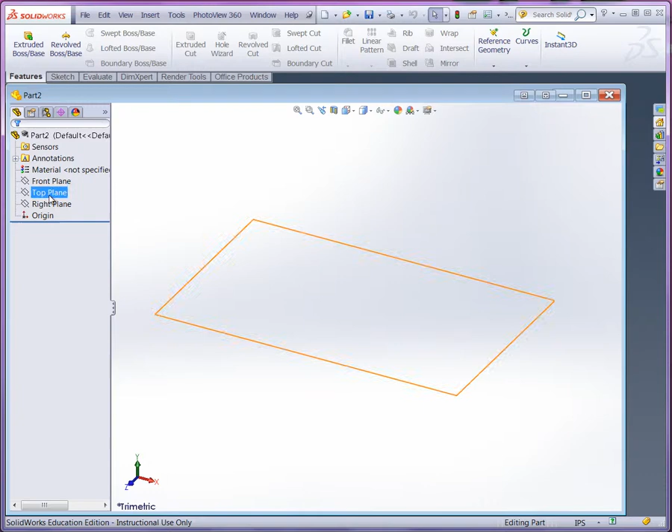Okay, so now what we'll do is we'll continue with the frame part. We pretty much could develop this part with just 2 or 3 different features. And what we'll do is we'll start with the top plane here. We'll create a sketch, basing everything on the origin there. We'll go ahead and set up some center lines so that we can establish the square base.

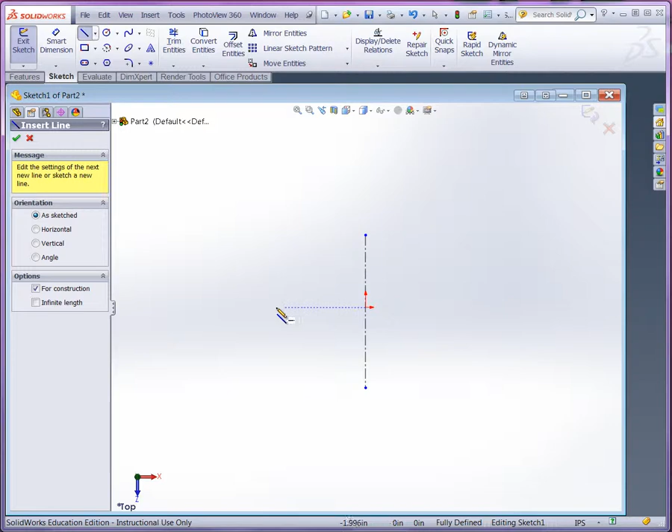I'm not going to use any kind of relations here other than coincident with the center lines here, just using them for reference, and just sketching a basic rectangle. Okay, then we'll use our smart dimensions. We've got the back here at 1.20, and we have our sides here at 1.10.

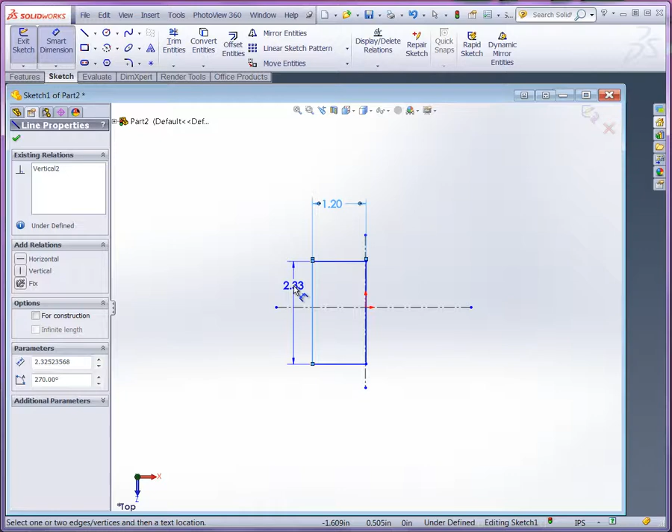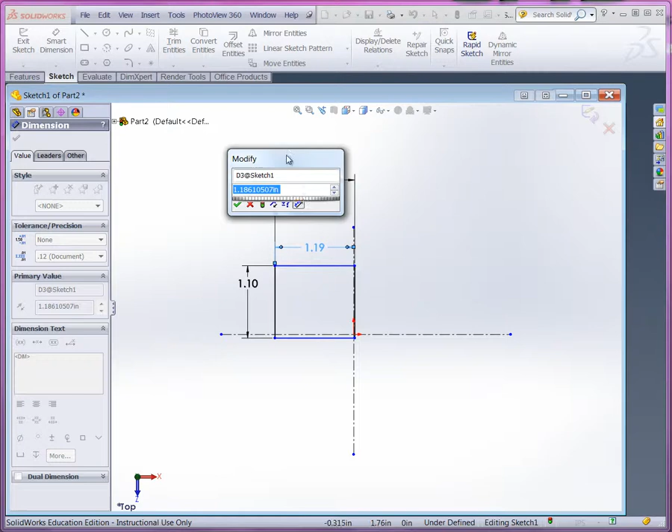Now again, you can see it's not aligned just yet, right? And what we could do here to align it, I'm going to dimension again from the side to the center line. Okay, and this is where you could use equations just to make this a little bit easier for you, right? Or you could just simply make this half the width, right? But if you think about this, if your part is changing, you might want to use equations just to ensure accuracy.

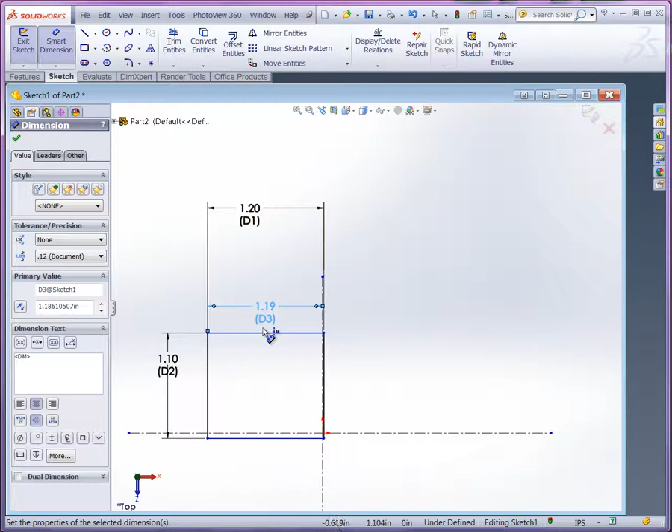And again, one way that we could look at this, let's get out of the smart dimension here, is if you're going to use view dimension names, you can see what they are. Again, if I double click on D3, I can use the equal sign here, and then simply select the dimension, and then use the math expression divide by 2. That should center it.

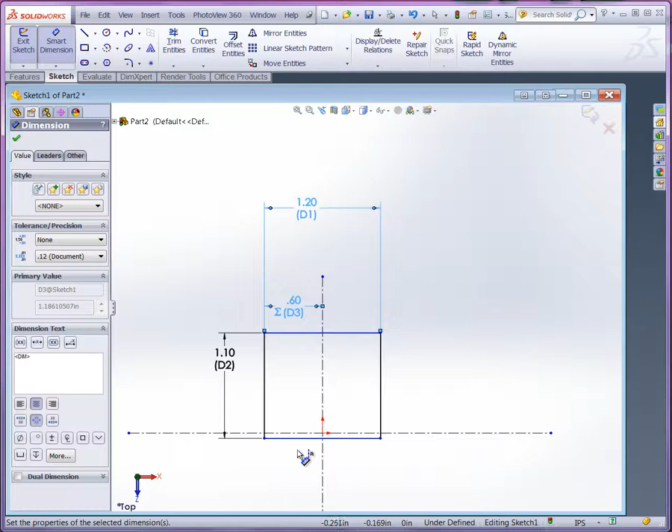I'll do the same thing with another dimension that I create here, and again, this is to align it vertically. So I'll use one edge here to the horizontal construction line there, and here I'll use equal, and I'll use this dimension divide by 2. Okay, and again, you could just do the simple math there to center it, to keep the design intent, the symmetry going.

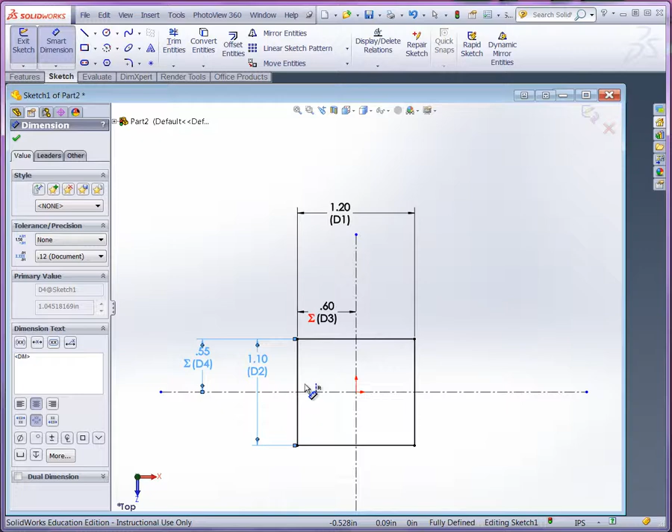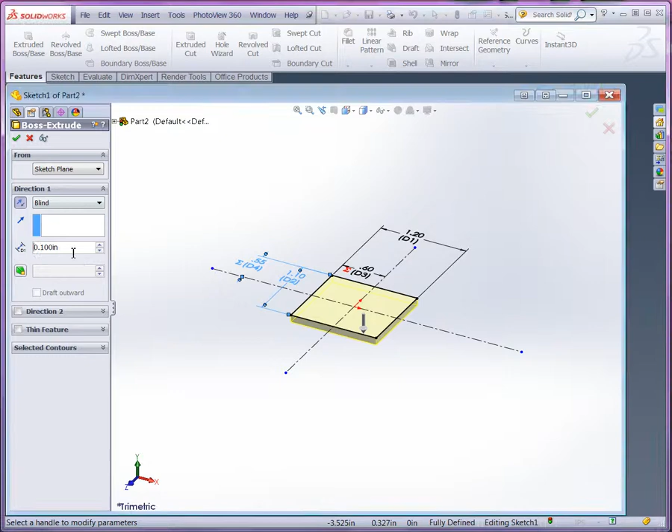And now what we'll do is we'll switch over to features, and I'll use extrude. This time I'm going to extrude going down, okay, so that the origin's on the very top face. And this thickness appears to be, alright, so we're going to do a total depth here of 0.2.

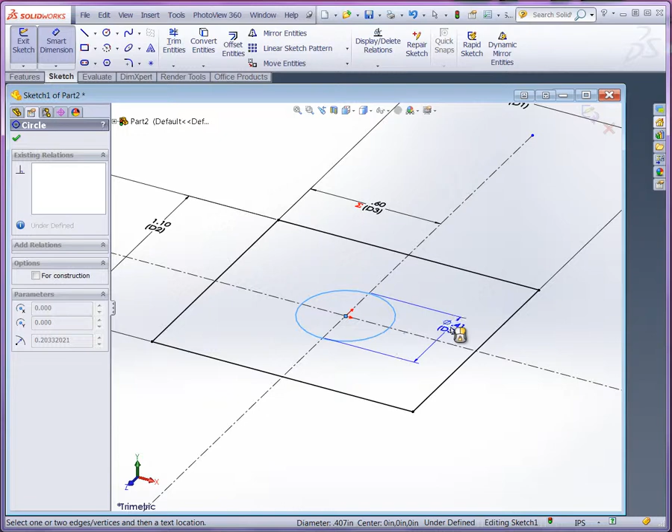Also, if I go back to that sketch, I'll go ahead and put in that circle for the hole that goes through, which is a diameter of 0.30. So again, I'll use the origin there and use my smart dimension to make that 0.30. Okay, now again, as a closed region within a closed region, that's automatically going to produce that hole right there.

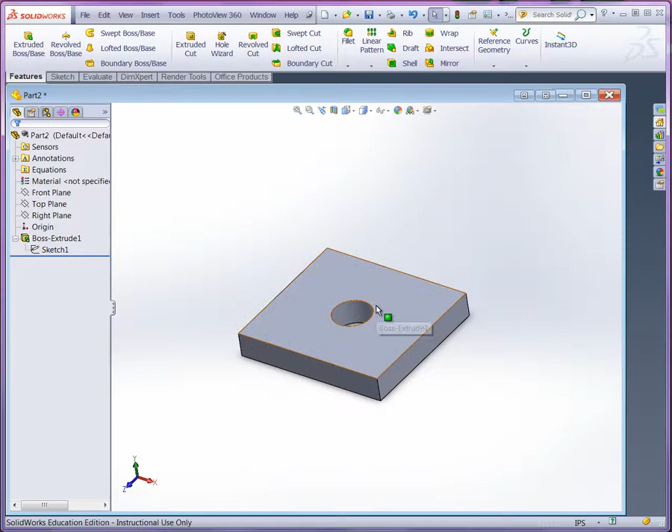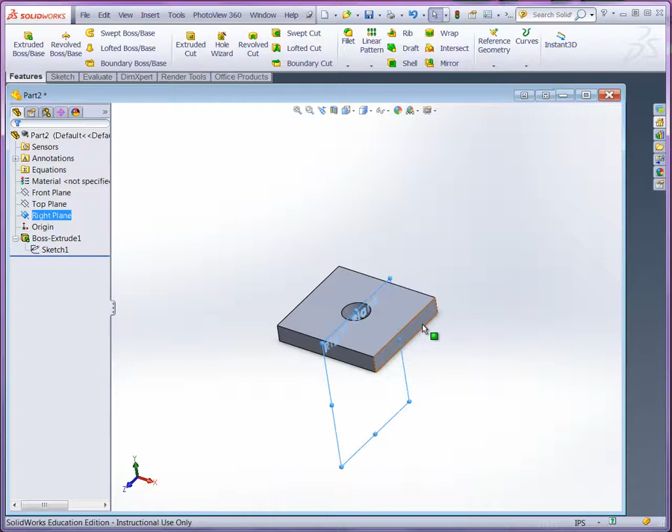Now, as we continue, we're going to use a mirror feature based on the one side that we create. And again, if you take a look at your standard planes here, you can see here's the right plane. We have 2 choices here. We can either offset another plane or simply use the face as a sketch plane for the side there that we're going to create. Either way would work, and it would move along even as the base changes. So what I'll do here is simply select the face and create a new sketch.

so a couple ways that we could approach this would be to either sketch our sides here, or because we're in a new sketch, I can control click each of these edges, all right, and using convert entities be able to project new lines into this sketch.

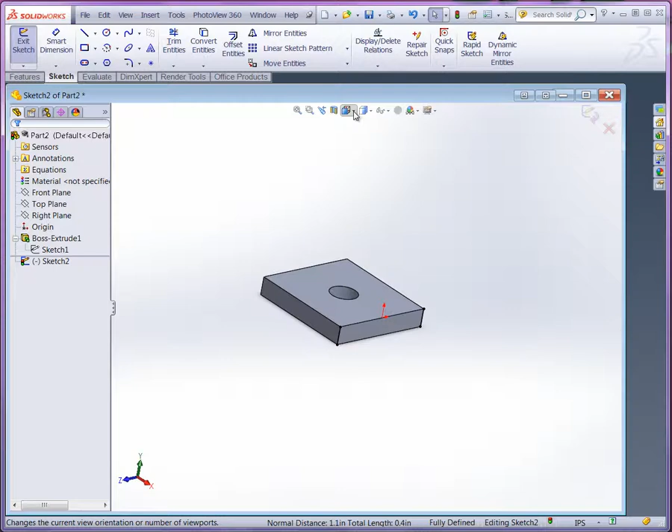Now that'll help because, again, as the base changes, we'll also have changes to the sides of these sketches. The other thing we want to look at here, if I go into a perpendicular view here, is to draw our center line from the origin, make it vertical, and then again set up our radius here. Okay, we can set up both the circle for the hole radius and then the diameter as well.

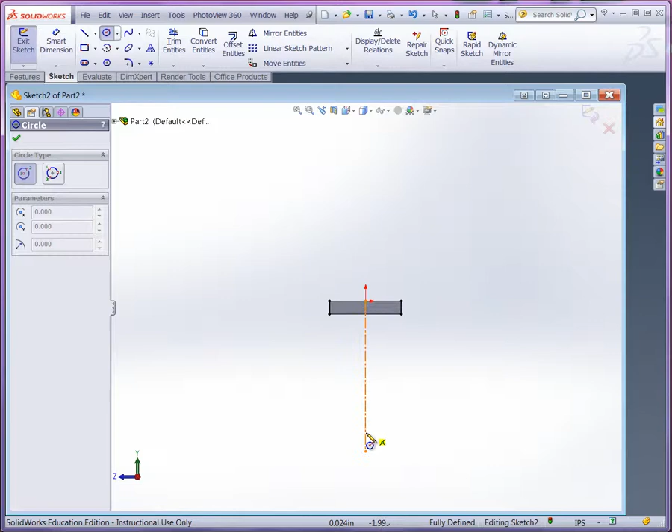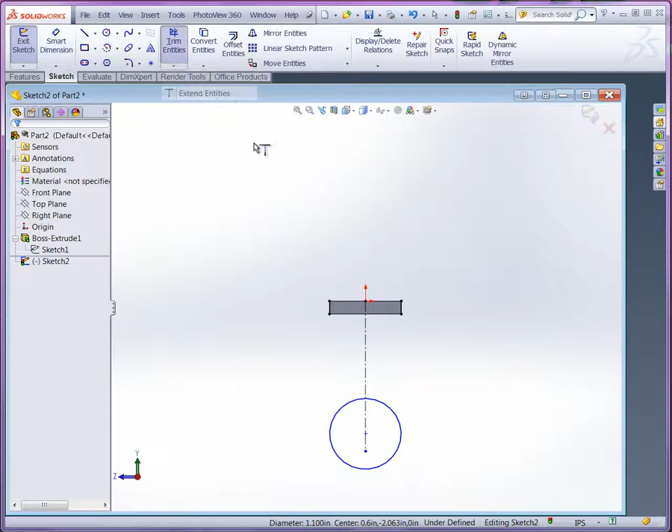Now, if I establish the radius here first, you can see how I can align it just by projection. And if you look at the smart dimension that I have here, you can see that it's 1.10. It's equal to the base width there. And what I'll do now is I'll go ahead and extend our lines and then use trim.

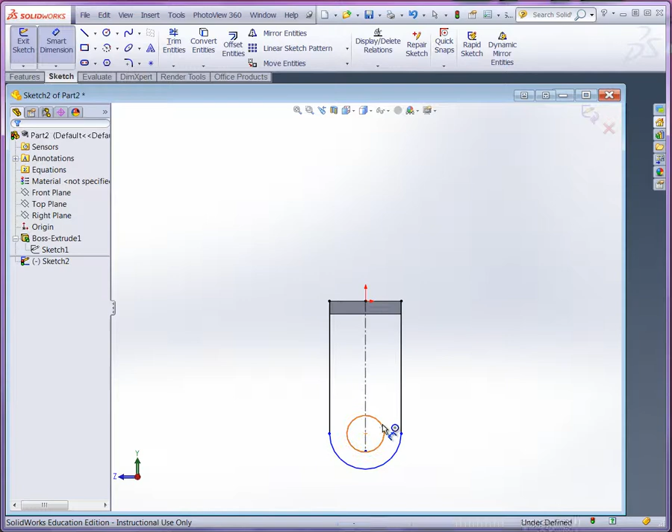So that center is also going to be the center for the hole, and then we'll be able to use a smart dimension to establish its overall height. So I'll go ahead and put that circle that represents the hole right on the center of the previous radius. We'll use a smart dimension for the hole, which is going to be 0.30. Okay. Now it's the position of both that hole and the radius that we're trying to control.

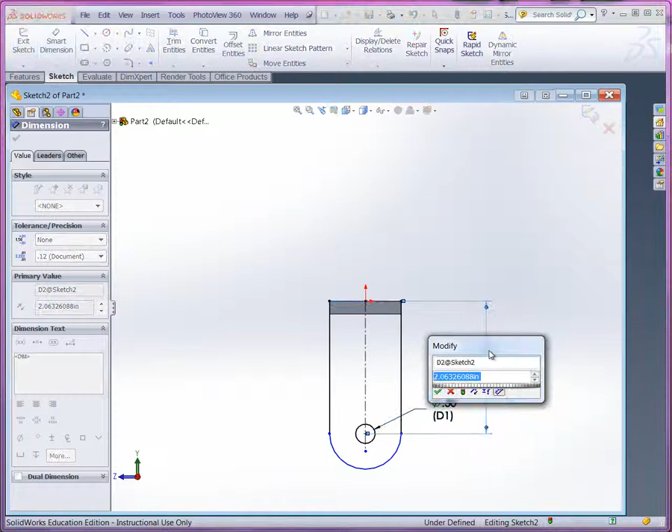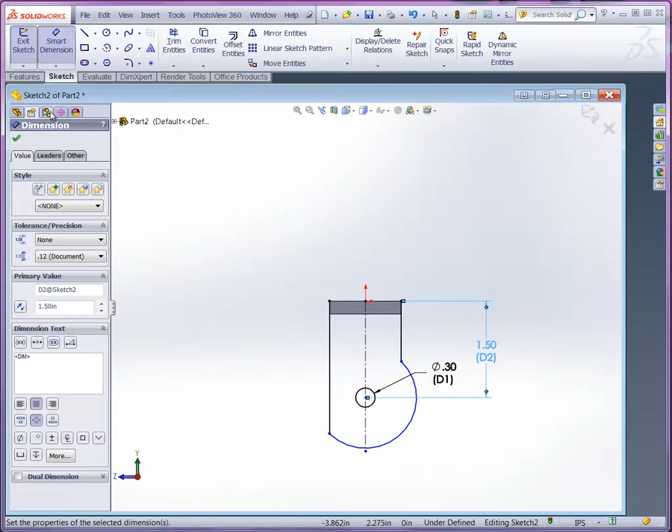Okay. So if I start from the top face here, come down to our center here, you can see this is what we have so far as a sketch. But if you look at the design table, we've got a default height of 1.50. You'll notice, because we haven't actually set the coincidence or set any kind of relationship for that second radius, you can see how what happens here is it gets pulled out, the dimension wasn't even set.

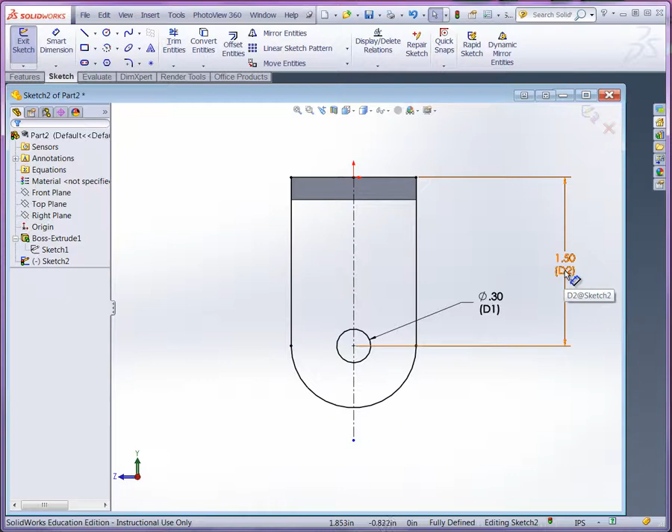What we could do here is we can use tangency. We can create some relations between this arc and the two sides to make sure that we keep a radius centered on the center line. So if I select the radius and select the edge here, I can make that tangent, and now you can see we have the right representation. You could test this if we double click here and just use the dynamic dimension wheel. You can see it's behaving properly now. Alright, we'll set it back to 1.50.

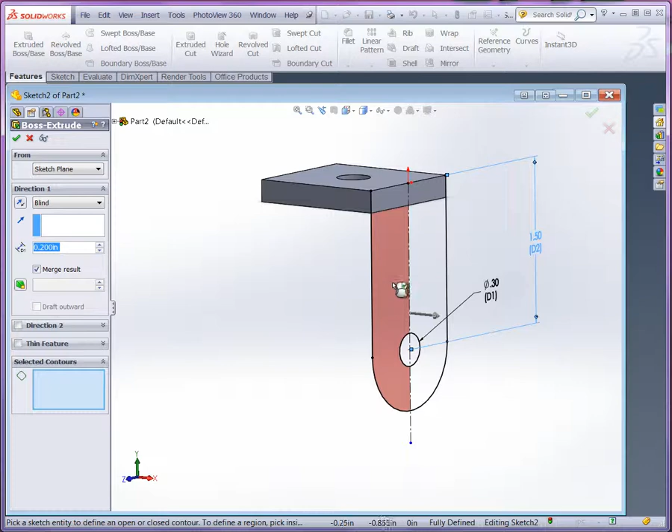So all we have here is just the profile. So what we'll want to do now is create the extrusion, and again we'll use extrude, but we'll use a contour. And you'll notice too, what you want to do is make sure we have the merge result checkbox. We have a default of 0.200. I'm going to go ahead and select both sides here. You'll notice the direction. We're going to reverse the direction. We have merge results. Confirm everything else. Click OK, and that should be one feature.

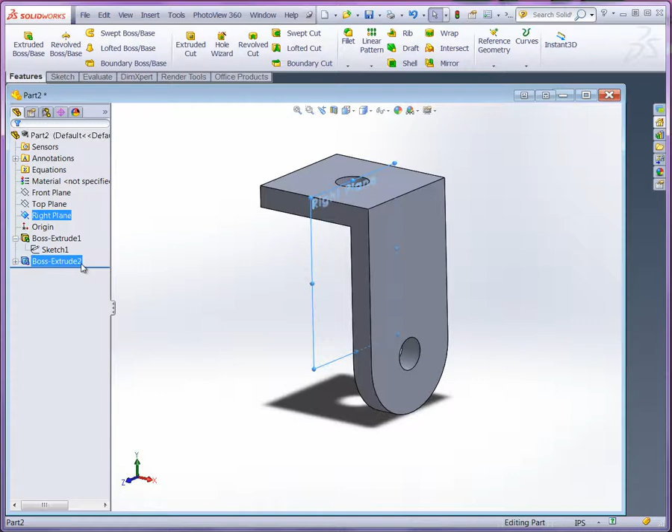And now to produce the other one, here's what we'll do. This is the feature that we want to mirror, and we're going to use the right plane. So control click the right plane and the Boss Extrude 2 feature, and then we could use mirror. The way that we set this up is going to enable us later on, when we use the design table, to simply edit. If we look at the sketch one more time, it's simply to track this dimension here. And as we track and edit this dimension, it's going to affect the feature, but also the other mirrored feature as well.

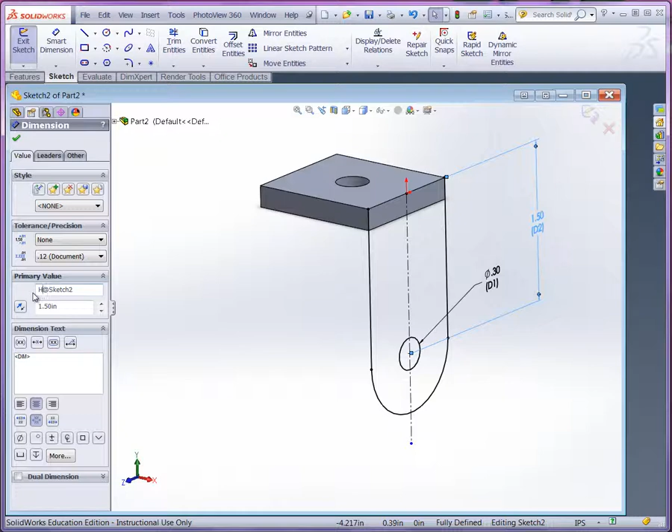Now, pay attention to this. This is called D2 at Sketch 2. One way that we could actually use this better in our design table is to rename it. So if I select it here, in the properties over here, we can rename this H, and it's going to be recognized as H at Sketch 2. All right? I'll close the sketch and you'll see the model update. So that's the frame. Let's go ahead and we'll do also the wheel.